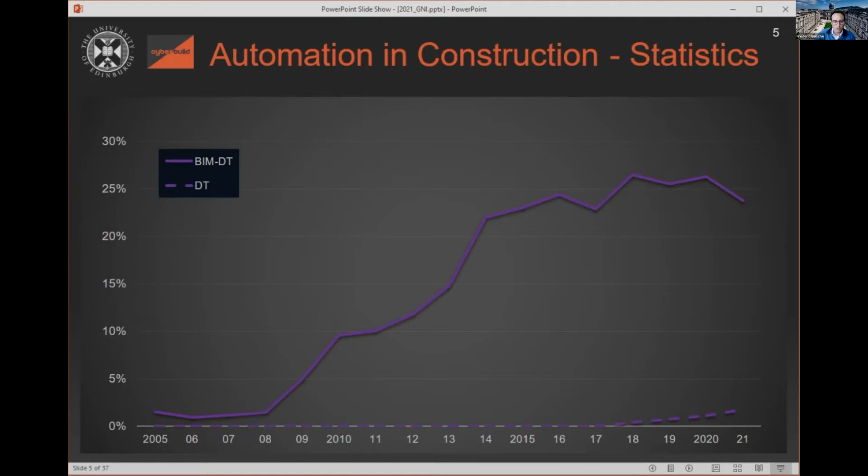And among this, you can see at the bottom, the digital twinning. So this is very recent, but you can see it's starting to take off. Okay, in fact, it's probably replacing a bit of the building information modeling terminology. But overall, 25% is really, really significant.

And now you can see what is AI. So let me clarify. When I say AI here, I've been looking for machine learning, deep learning technology, convolutional neural network, CNN, this kind of terminology. It doesn't cover the whole of AI, but modern AI, let's say, especially supervised learning methods. And you can see how since 2015, the number of papers that use AI has just shot up.

And now we are at 25% of all our publications that use or make reference to AI, at least in their title, abstract, or keywords. And within this, there is an area that has been quite buoyant: using AI for crack detection. In fact, Eleni just before me did refer to this type of research. By themselves alone, they represent 3% of our publications. And that has been growing. So I think that's quite insightful.

And now if you look at AI and BIM and you look at combining them, then you can see that now about 4% of our publications in their abstracts, titles or keywords collectively make reference to BIM or DT, and then AI terminology. So, all this is a really, really hot area and growing quickly.

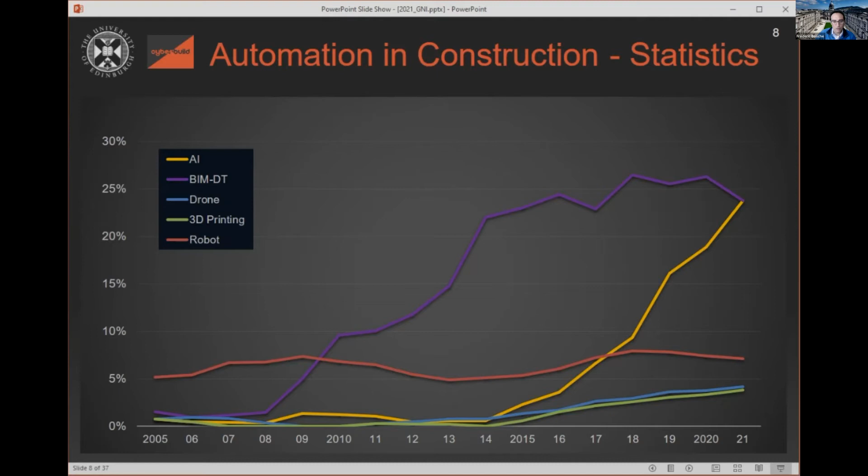Now let's go to digital twinning. What is digital twinning? People who have covered this already in their presentations may have already provided some definitions. There is no clear, broad understanding about what is a good definition of digital twinning. In fact, there is a center that is highly referred to these days called CDBB in Britain, Centre for Digital Built Britain. And if you look at two of their publications, one is the Digital Twin Hub, and another one of their publications, they actually give you two different definitions.

The first one is a realistic digital representation of assets, processes, or systems in the built or natural environment. And the second one is a bit longer. It gives more purpose to it. It explains that it's used to make decisions that will affect the physical asset, but also that any changes to the physical asset should be reflected in the digital twin. And therefore, I think a good definition should probably be combining those two.

What I like about the first one is that it makes references to the assets. A lot of people think about digital twinning in the context of asset monitoring. But actually, processes are also an important area where digital twinning applies, and I'll show you an example later. And another thing that is really important that is not captured in the first definition is that the information has to loop around. So you also need to capture changes in the physical asset and reflect them in the digital twin. And arguably, a lot of what Eleni presented before me is about that or supports that.

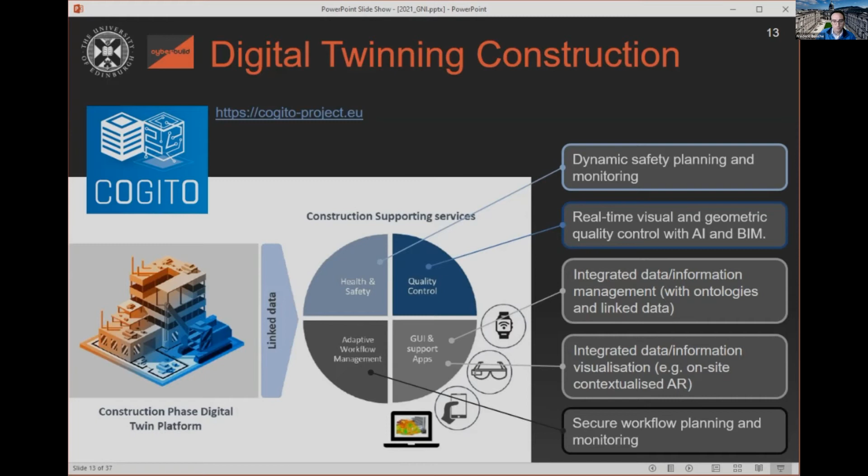Sorry, my slide was slow.

So now I'll talk a little bit about two applications that broadly fit within the framework I just discussed. One is Scan-to-BIM, and the other one is Scan-vs-BIM, and I'll explain what this is about. But both of them rely on the fact that we have had this explosion in capability in terms of acquiring 3D imaging data from any sort of environment. But that is particularly useful for capturing data of the built environment, whether it is an operating asset or a building under construction or else.

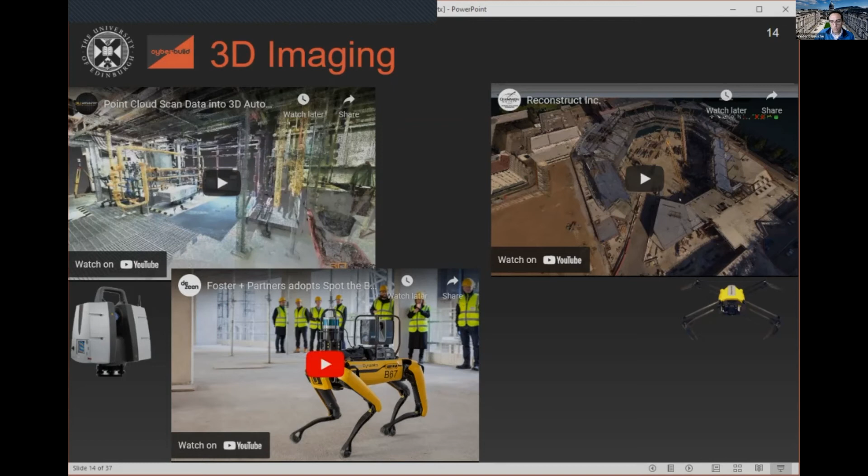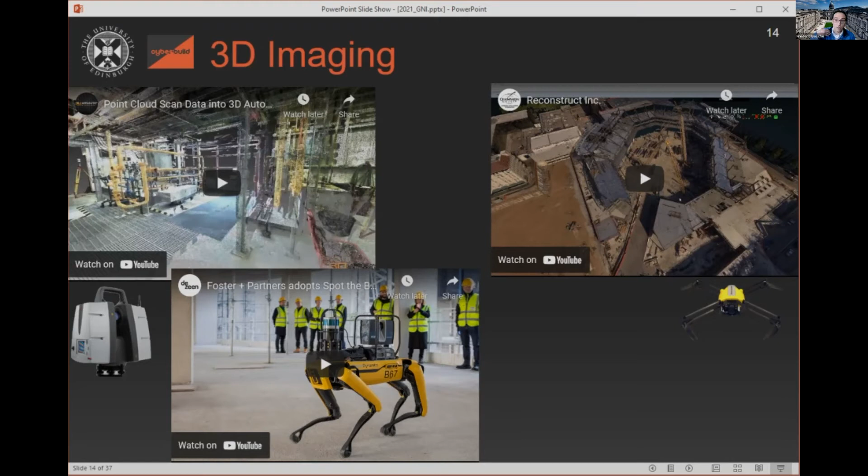And here I have videos I don't play today, but on the left-hand side, you have essentially laser scanning based solutions. And here we have a scanner at the bottom mounted on the Spot robot that we are going to play with here at the university as well. And on the right-hand side, more drone-based solutions. In fact, many of you may have seen the presentation from Mani at the beginning of this symposium, and this is actually the company Reconstruct that he is involved in, that is based on his research, and is doing excellent work by using this type of data.

And so the idea of Scan-to-BIM is that, in order to be able to benefit from semantically rich models for operating or renovating, refurbishing the built environment, we need to create those models in the first place. And for most of the built environment, we don't have these models, and we need to create them. So the process of creating those models is based on the acquisition of 3D geometry. It's certainly not the only information you need, but this is a very important step in the process.

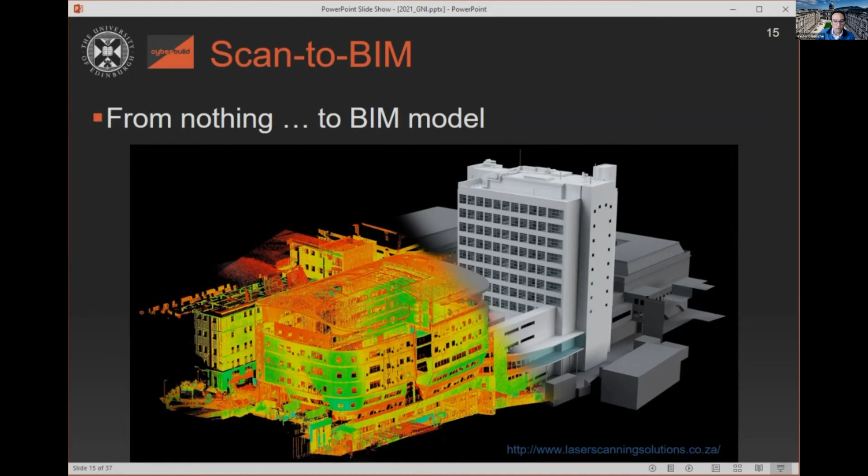And when you look at the literature on Scan-to-BIM, you can see how things have evolved and how slowly modern AI techniques are attacking the problem. So this is just for the general audience to explain: the idea here is that we start at the top left with a point cloud model. And at the end, at the bottom right, we need to have a 3D volumetric and semantically rich model. And to go there, you go through different stages. And here we show the typical stages.

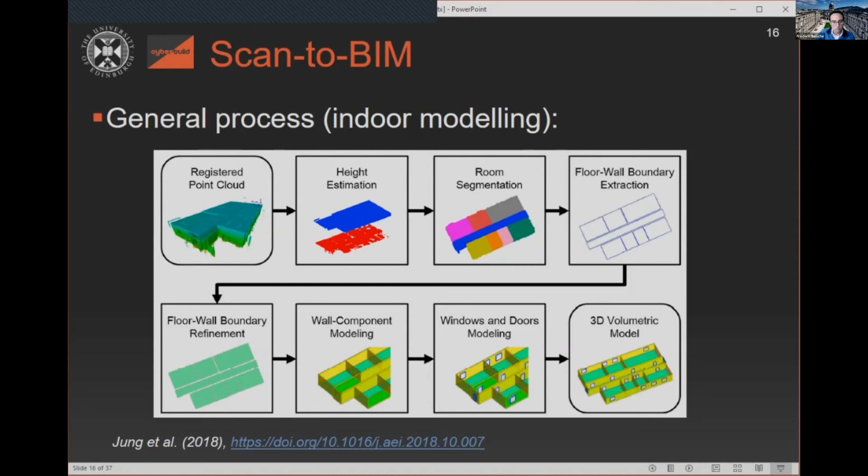They don't have to be exactly in that order, or performed exactly like this, but typically people look for floors. Once they have floors, they look for the rooms or spaces, and then they start modeling those by finding the boundaries, modeling the walls, then finding openings like windows and doors, and slowly and continuously enrich the model, okay? And this is a paper from 2018 that uses more standard traditional computer vision techniques.

But more and more people have been looking at increasing the robustness of those algorithms. The first thing people have looked at is to embed topology detection and model the constraints of topology, that a wall should be connected to a floor and ceiling, in order to ensure that not only the models look good, but they're actually semantically logical. And they also improve the overall performance of the modeling.

Now, these things have often been done using hard-coded rules, but there's certainly some work. I think we saw in the presentation from Rafael Sacks on the first day some work about learning topologies in buildings using machine learning. And this could certainly feed into models like that.

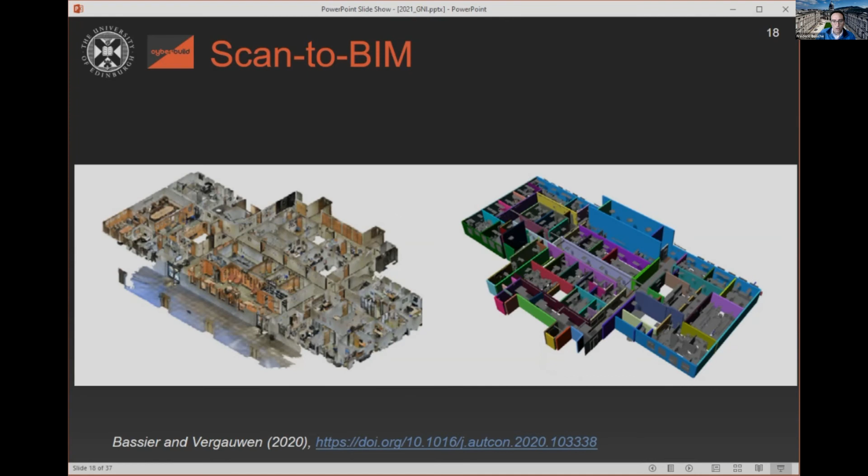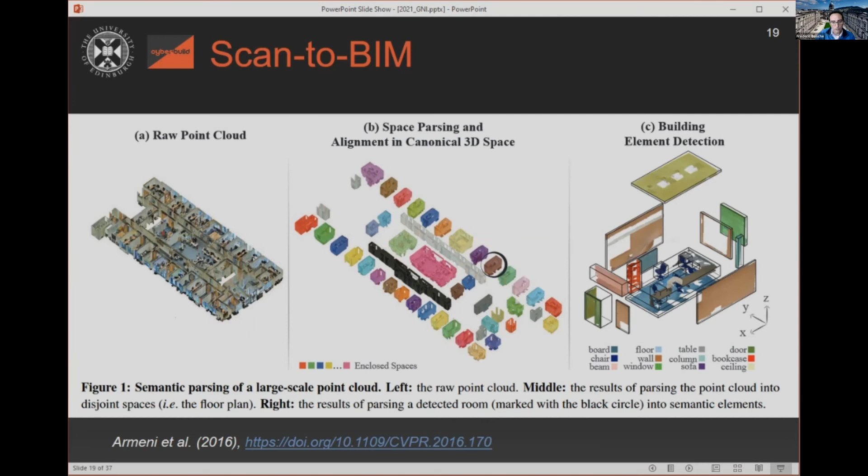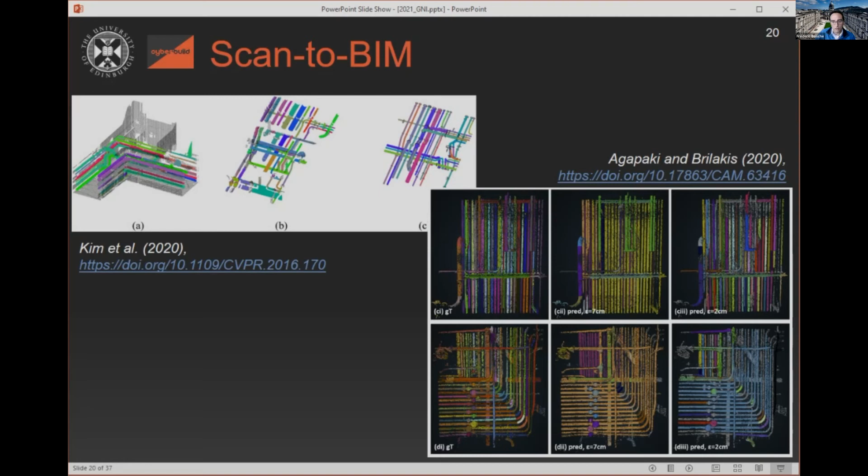For example, we have this paper from Iro, who's now at ETH, and her colleagues, who have been using semantic modeling to detect different types of components within spaces. We also have some recent work using instance segmentation to segment the point cloud, but also model the components and semantically enrich the models at the same time. So there are some really interesting new ideas that are all machine learning, or at least supervised learning based techniques, that are, I think, improving the state of the art and will trickle down and continue to improve what we can achieve.

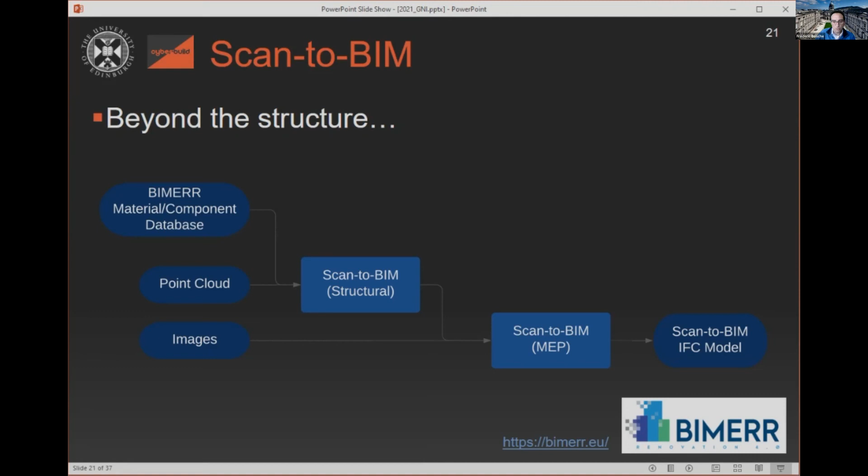Just a shout out for ourselves. We've been doing some similar work. For example, what we do in the BIMERR project is we do some Scan-to-BIM on the structural side, just like many people have done, finding walls, finding windows, finding ceilings, you name it, but also try to continue the enrichment with mechanical, electrical, and plumbing equipment.

So here, using imagery from photogrammetric reconstruction, we train models to detect different types of components. And once we have these detections, we can actually reproject them into the model and enrich the models further. And that can be quite useful for doing things like energy analysis, but also if you have to plan renovations, you would need to know where some electrical components or mechanical components are located. So, this is some work we do, and there are other people actually I've seen who do similar things.

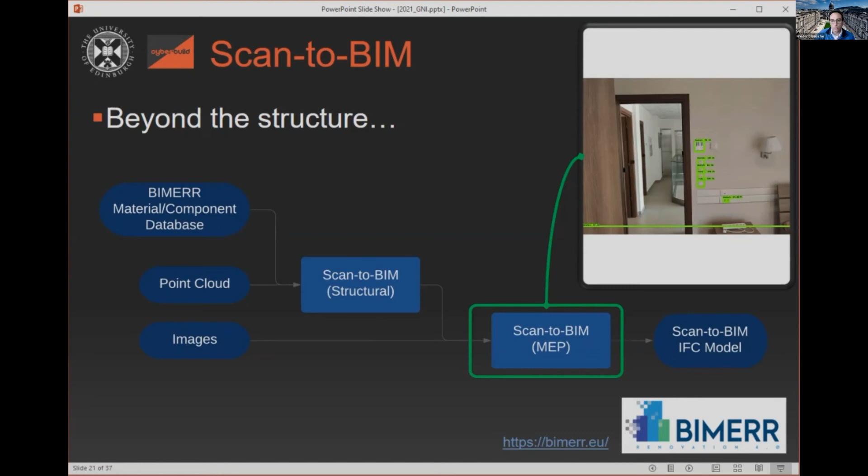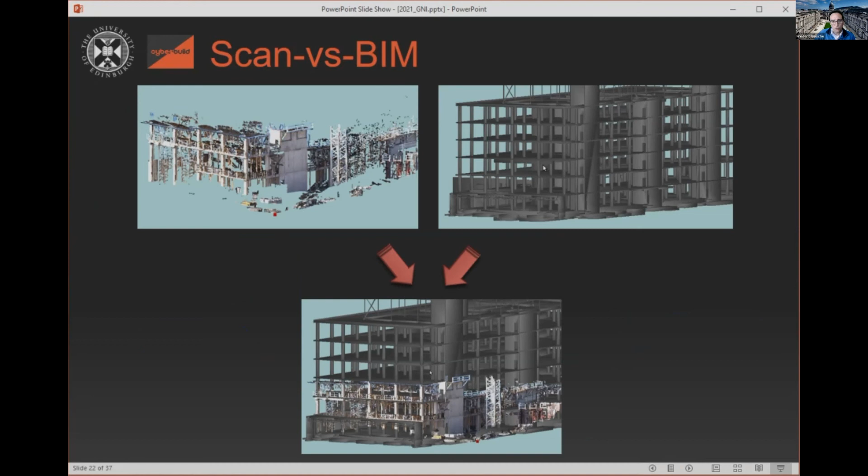I'll now talk about the second, and that'll be my last topic, I think, which is scan versus BIM. So what's the difference between scan-to-BIM and scan versus BIM? In the context of scan versus BIM, we believe that we already have a semantically rich model of the asset. And this is increasingly true for all the new buildings that we are building. We don't just generate the traditional old 2D drawings. We actually now generate those semantically rich models.

And we can use the 3D imaging technologies to acquire data. For example, here we have a laser scan on site. And we can use the prior of the design model, the BIM model, to process that data and infer various types of information. So I show at the bottom, if we put the two models in the same coordinate system, then you can start making inferences or help in the processing of the point cloud, which, in the construction domain, one of the big challenges of this type of data is that there's so much noise everywhere, so much temporary stuff here and there. You can see in the image here, this is during structural construction.

There's a lot of formwork, there's safety equipment, there's shoring, once it's finished there is the crane, there's so much stuff everywhere. So, if you were to process this without any prior, well, you might be able to to some extent, but I think having the prior of the BIM model is something you must rely on. Or it would be, in a way, a bit stupid not to make use of it.

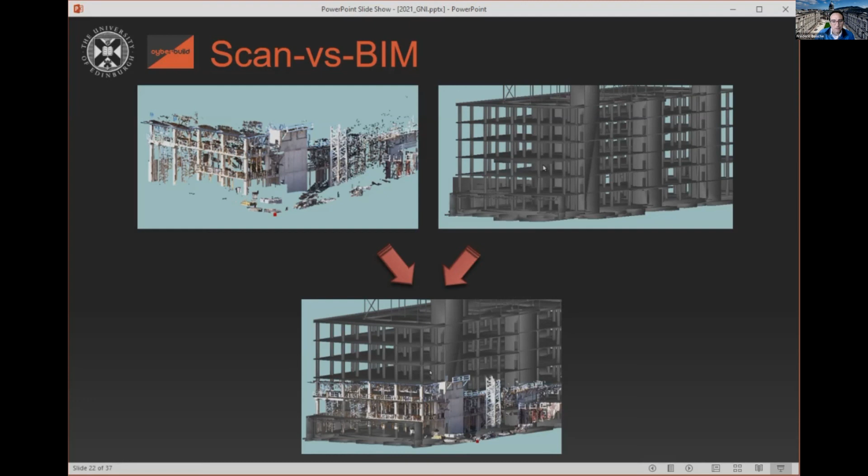Now, I personally did some work in that area for quite a while, and I continue to do some work at the moment. But I think some of the interesting work that has been done is actually by you, Andre, and your colleagues in Munich, where you were using this to try to track progress in construction. And so the typical way to approach the problem is to say, well, you can look if a point is next to a component, next to an object in the BIM model. And if you can find many of those points, then you can probably infer that the object has been built and is there, right? So this is a traditional approach that every one of us has been using.

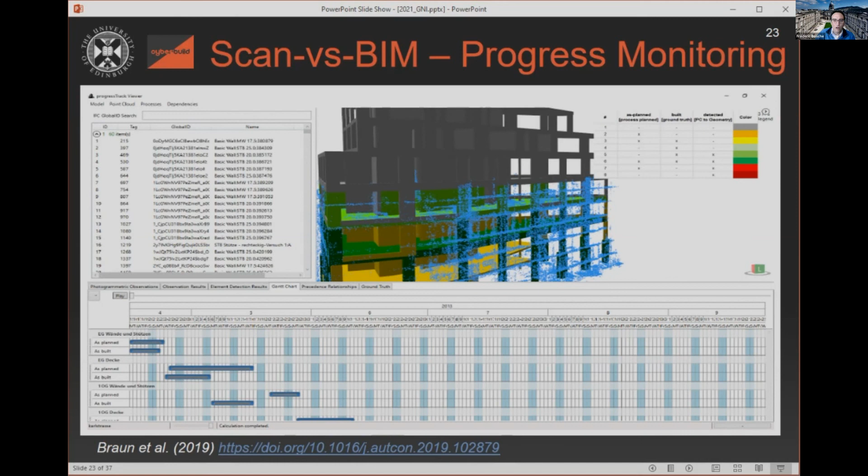The only issue is that it only gets you so far. You can easily get confused, and you need to improve the robustness. So you can use different types of AI techniques for this. Here in their paper, they propose two things, actually. One is to do some color analysis, because often these point clouds come with color. And for example, they were showing here in the image how you could distinguish formwork from finished concrete, right? Formworks tend to look different. In fact, they are often very colorful.

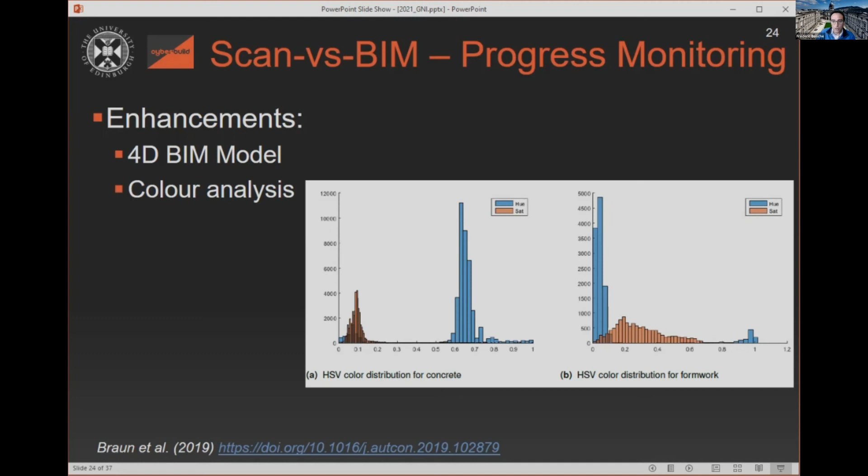And so, it's a basic idea, but it's actually quite good, especially because if you look at the surface of formwork and the surface of the finished column, they are very close to each other. So distinguishing the two without using additional information than proximity might be difficult, especially if you base your analysis on drone data, for example. So using color here is a great idea, and they even push the idea further in a way, in a logical way.

They train a CNN network to recognize formwork. It's interesting to say, let's look at color, but the logical thing now is to say, actually, formwork is visually quite distinctive. So surely we can train an RCNN to detect them, or other types of networks. And yes, it actually works quite well. And they were able to show that they can use these detections to further improve their performance.